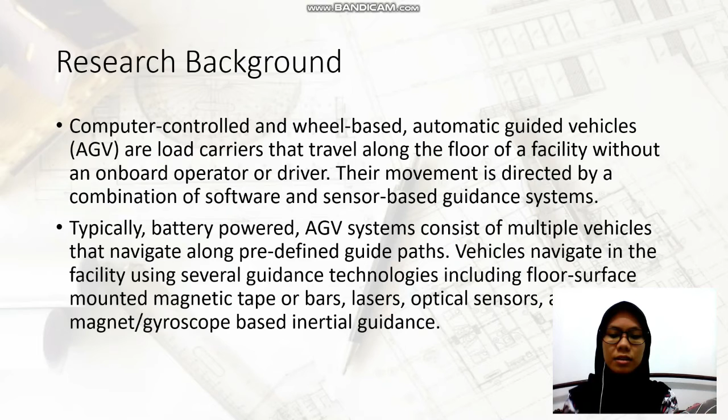For real-time control and monitoring of multiple AGVs, computer-based software uses wireless connections to collect data about each unit's current location. Then, the software interface for destination and routing logic is feasible to provide different routes and junctions that can be selected by the overall control system to allow the AGV to deliver products via different routes to multiple operations. The AGV often operates in the same working area as other users, such as forklift trucks and the workforce. Therefore, they include appropriate safety systems.

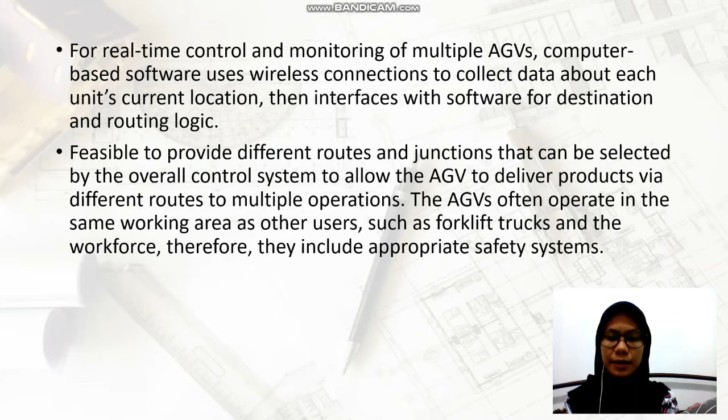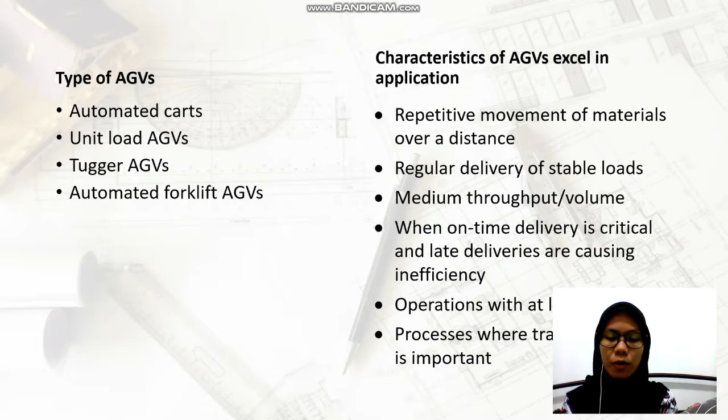There are several types of AGVs: automated carts, unit load AGVs, tugger AGVs, and automated forklift AGVs. Characteristics of AGVs excel in applications involving repetitive movement of material over a distance, regular delivery of stable loads, medium throughput or volume, when on-time delivery is critical and late deliveries cause inefficiency, operation with at least two shifts, and processes where tracking material is important. AGVs provide automated material movement for a variety of industries, including efficient, cost-effective movement of material, which is an important and common element in improving operations in many manufacturing plants and warehouses.

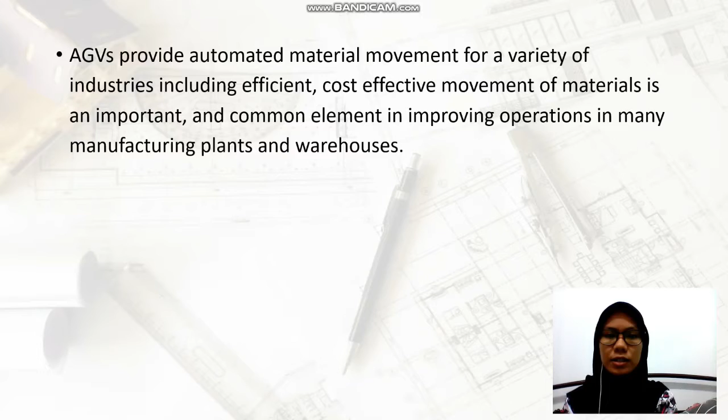So back with me again. The problem statement for this research is that we have four main problems in every AGV system. First, the design of the guide path, which means this problem specifies the possible path on which a vehicle can travel. The second is the dispatching problem, which is about where and when vehicles should go for container loading or discharging tasks. The third problem is vehicle routing, which aims at finding a good path for the AGV vehicle dispatched for a certain task. Lastly is conflict resolution, which is mainly for a fleet of vehicles between the vehicle and other container handling equipment. So basically, these four problems need to be solved before we proceed with the research.

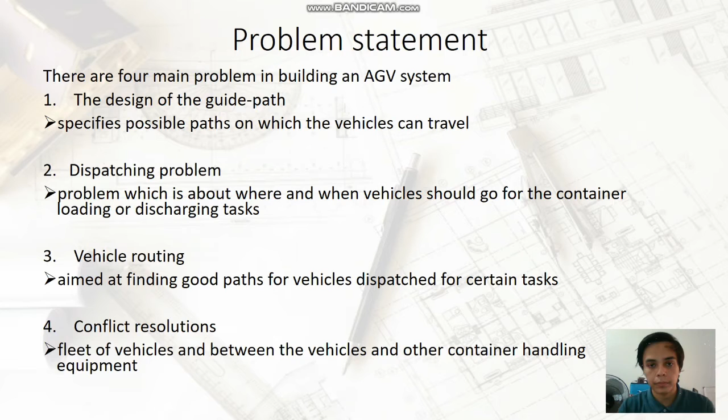Today I will present the objectives of our research, divided into three points. First, to find out the efficiency and effectiveness of the Automated Guided Vehicle (AGV) system in industry for specific tasks by using EEG signals. Second, to extract the most suitable features such as cost, design, durability, and flexibility of the AGV system and EEG signal classification for modern industry. Last, to provide a creative solution that enables individuals with motor, sensory, or cognitive disability to be more independent, productive, and included in society and community life.

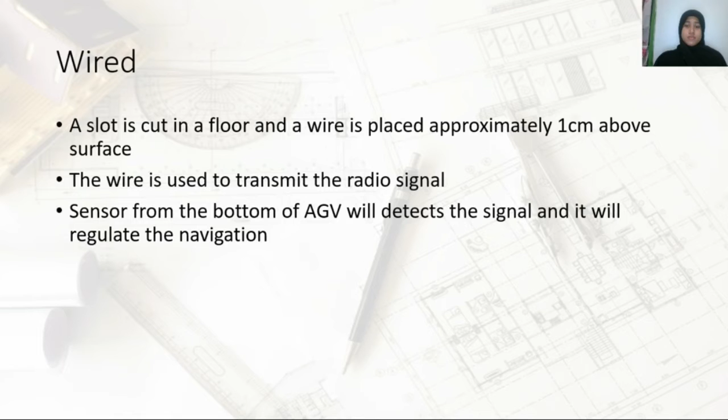For guided tape, the AGV is fitted with an appropriate guide sensor to follow the path of the tape. One major advantage of tape over wired guidance is that it can be easily removed and relocated if the course needs to change. Colored tape is less expensive, but lacks the advantage of being embedded, so it can become damaged or dirty in high traffic areas.

A flexible magnetic bar can also be embedded in the floor like wire, but works under the same provision as magnetic tape, so it remains unpowered or passive.

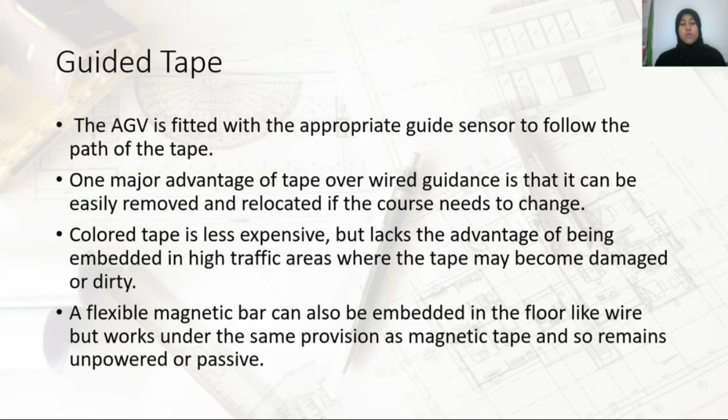Laser target navigation is done by mounting reflective tape on walls, poles, or fixed machines. The AGV carries a laser transmitter and receiver on a rotating turret which is received by the same sensor. The angle and sometimes distance to any reflector in line of sight are automatically calculated. This allows the navigation system to triangulate the current position of the AGV. The current position is compared to the path programmed into the reflector layout map, and the steering is adjusted accordingly to keep the AGV on track.

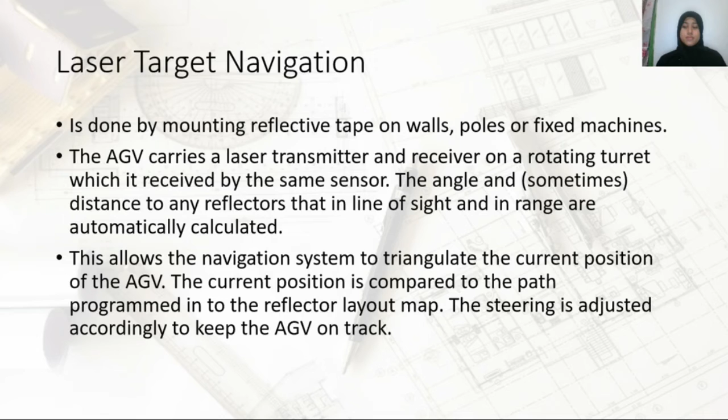Currently, there are two types of laser target navigation: the modulated laser and the pulse laser.

First, the modulated laser. By emitting a continuous fan of modulated laser light, a system can obtain an uninterrupted reflection as soon as the scanner achieves line of sight with a reflector. The reflection ceases at the trailing edge of the reflector, which ensures an accurate and consistent measurement from every reflector on every scan. By using a modulated laser, a system can achieve an angular resolution of about 0.1 mRad, or 0.006 degrees, at 8 scanner revolutions per second.

For the pulse laser, a typical pulse laser scanner emits pulse laser light at a rate of 14,400 Hz, giving a maximum possible resolution of 3.5 mRad, or 0.2 degrees, at 8 scanner revolutions per second. To achieve workable navigation, the reading must be interpolated based on the intensity of the reflected laser light to identify the center of the reflector.

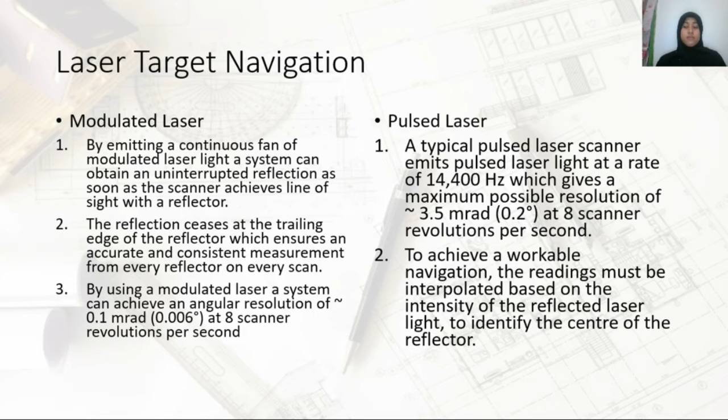For inertial navigation, a computer control system directs and assigns tasks to the vehicle. Transponders are embedded in the floor of the workplace, and the AGV uses the transponder to verify that the vehicle is on course. A gyroscope is able to detect the slightest change in direction and correct it in order to keep the AGV on its path. The margin of error for the inertial method is plus or minus 1 inch.

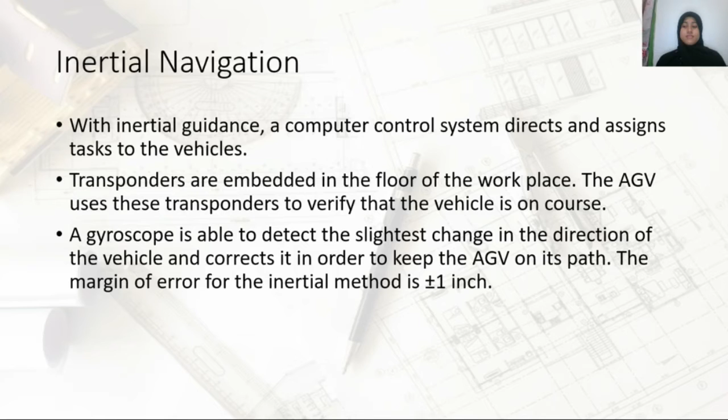Natural feature navigation uses one or more range-finding sensors, such as a laser rangefinder, as well as gyroscopes or inertial measurement units, with Monte Carlo localization techniques to understand where it is as it dynamically plans the shortest permitted path to its goal. The advantage of this system is that it is highly flexible for on-demand delivery to any location. They can handle failures without bringing down the entire manufacturing operation, since the AGV can plan paths around the failed device. They are also quick to install, with less downtime for the factory.

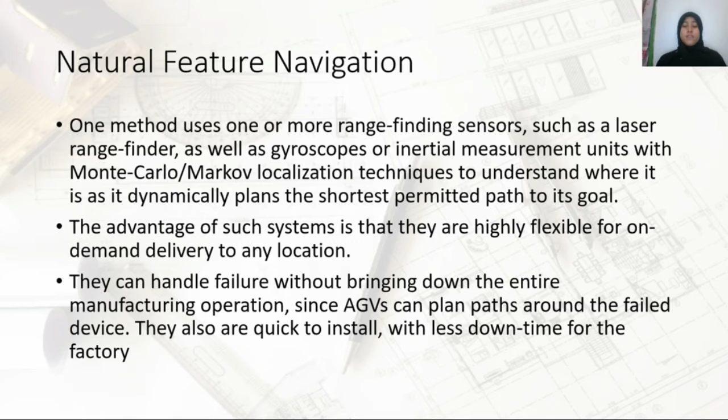Vision guidance. They operate by using cameras to record features along the route, allowing the AGV to replay the route by using the recorded features to navigate. Vision-guided AGV uses evidence grid technology and application of probabilistic volumetric sensing. The evidence grid technology uses probability of occupancy for each point in space to compensate for the uncertainty in the performance of sensor and environment.

These sensors are specially designed stereo cameras. The vision-guided AGV uses 360-degree images and builds a 3D map, which allows the vision-guided AGVs to follow a trained route without human assistance or the addition of special features, landmarks, or positioning systems.

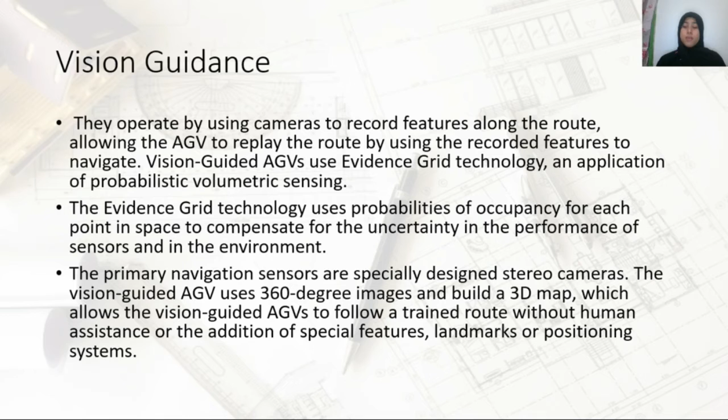Geoguidance. A geoguided AGV recognizes its environment to establish its location. Without any infrastructure, the forklift equipped with geoguidance technology detects and identifies columns, racks and walls within the warehouse. Using this reference, it can position itself in real time and determine its routes. There are no limitations on distance to cover or number of pickup or drop-off locations. Routes are infinitely modifiable.

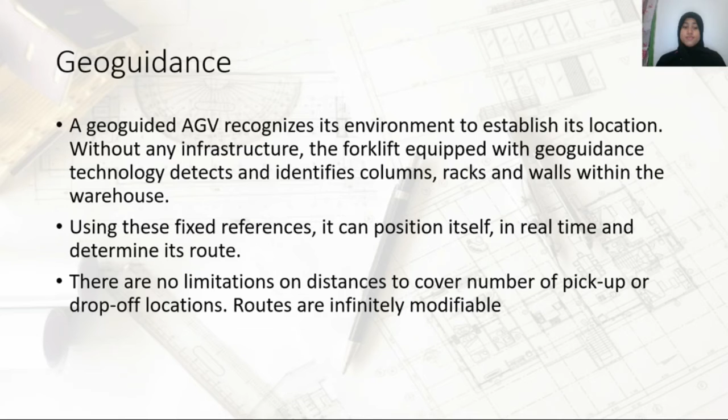Today, I want to continue my friend's presentation, which is on financial budget for an AGV. First of all, let's talk about the price. As we all know, the AGV cost is different depending on the AGV type itself. For example, it can be starting from 14 for an automated guided cart AGC, near 30 for a towing tractor, 60 for an automated pallet jack, around 80 for a forklift AGV, and around 150 for an automated very narrow aisle truck VNA. The figure 1 below shows an example of AGV, which is commonly used in the factory.

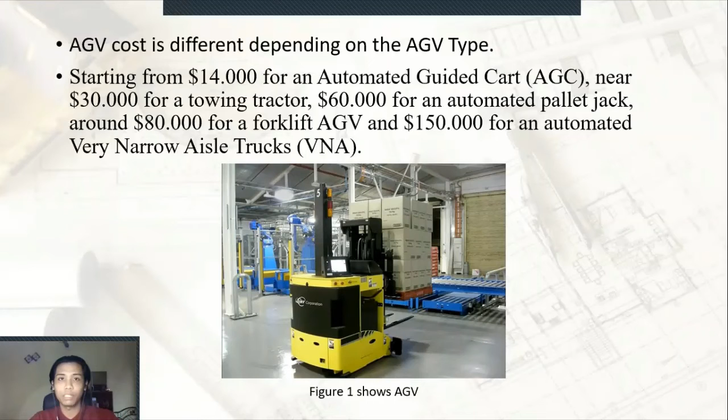AGV can need more power, more battery, and more structure, and thus it will cost you more. The amount of the project budget will also influence the planning. In the final account, the budget is also a key factor in determining the complexity of the project.